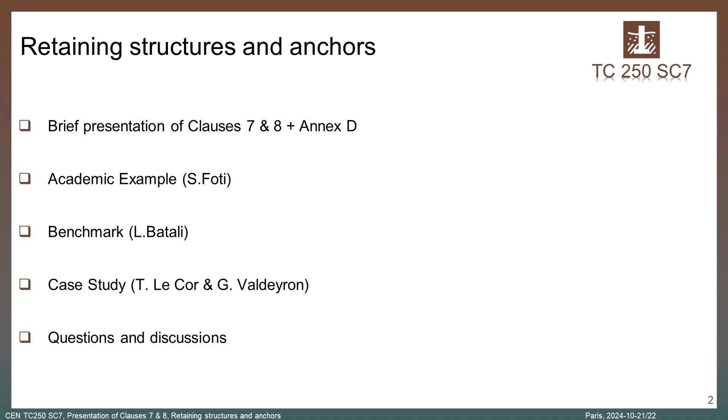made of 4 presentations: a brief presentation about clauses 7 and 8 that are really related to retaining structures and anchors, plus a short presentation of Annex D, where you can find different calculation models in line with the design of retaining structures and gravity walls.

After, there will be an academic example presented by Sebastiano. Then, the results of the benchmark will be presented by Loretta, and to finish, we will have a presentation from Gilles about a case study. It has been prepared by Thomas and Gilles, but Thomas is not here because his wife just had a baby, so he has better things to do, if I can say that.

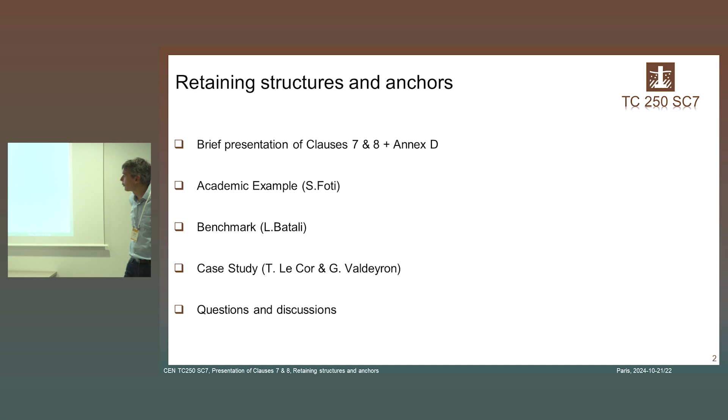We have more or less an hour and a half to cover all these subjects with questions and discussion. So the idea is to maybe have questions just after each presentation, and since the presentations are not so long, it will be possible to have a general session of discussion at the end.

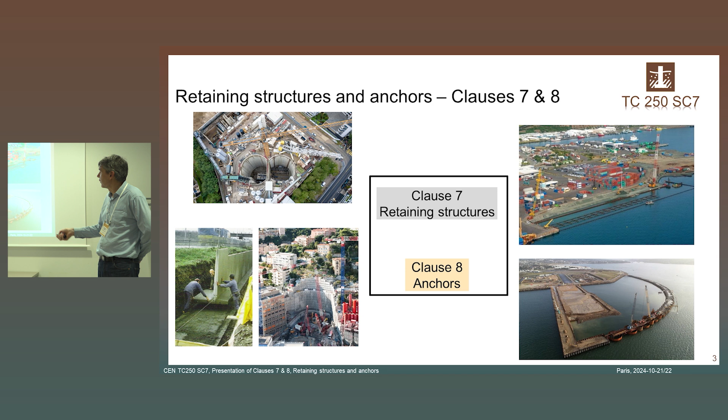The content of clause 7 and clause 8 is about retaining structures and anchors, so it covers a very large range of structures. You can have, for example, a metro station; it can be used for maritime infrastructure, or it can be used for gravity walls, so for maybe a simpler geotechnical structure, or a big retaining wall, as you can see there in Monaco, for example.

So the design of these structures refers to different parts of Eurocode. First of all, of course, Eurocode 7 part 1 and part 2 regarding the GIR and the GDR, as has been described this morning.

There is the question of groundwater level, which will be addressed, I think, by you, Adrian, not in this room, but in the amphitheater, just after the coffee break. It refers also to numerical models; finite element methods are more and more used to design all these structures, especially huge retaining walls or huge deep excavations.

The interaction with the other Eurocodes is also ensured regarding Eurocode 0 for the design principles, the actions - especially, for example, for maritime infrastructure, as Jean-Bernard said this morning, when you have waves and river, you can have actions from both waves and rivers - and after you have the structural verification, depending on the type of material: concrete for diaphragm walls, steel for sheet pile walls. You can also have timber and masonry if you have that type of geotechnical structure.

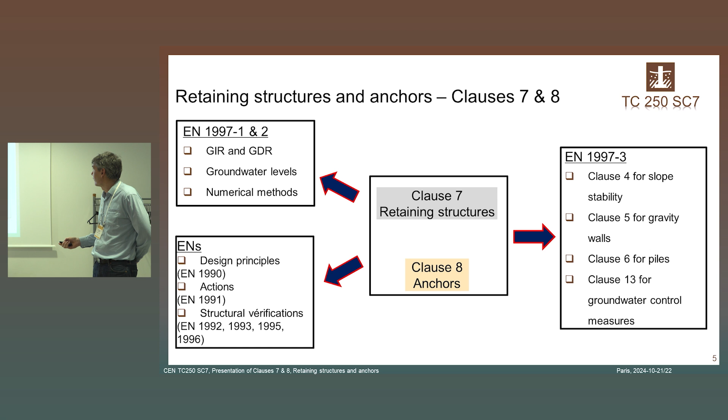After, inside Eurocode 7 part 3, these two clauses are in interaction with many other clauses. Maybe it's not the case when you read shallow foundations or deep foundations - the interaction with other clauses is not so important there - but here you have to refer, of course, to clause 4 in order to check the overall stability.

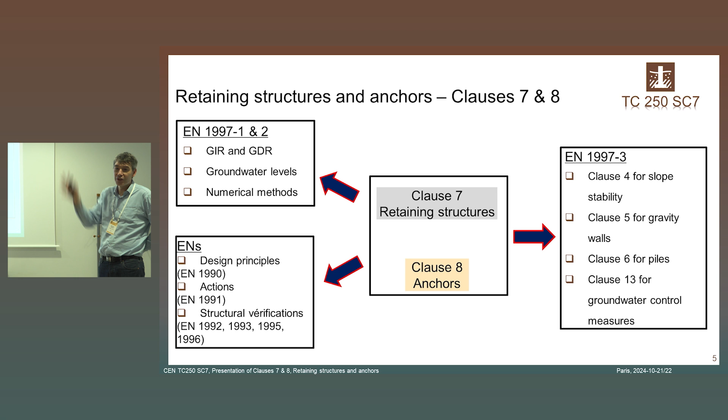When you design a gravity wall, you have to refer to clause 5 in order to verify the external stability of your wall, considering the sliding verification, the bearing capacity verification, and in some conditions where you have a wall on piles, or a diaphragm wall submitted to huge vertical loads, you have to refer to clause 6 in order to verify the bearing capacity of the diaphragm wall, for example.

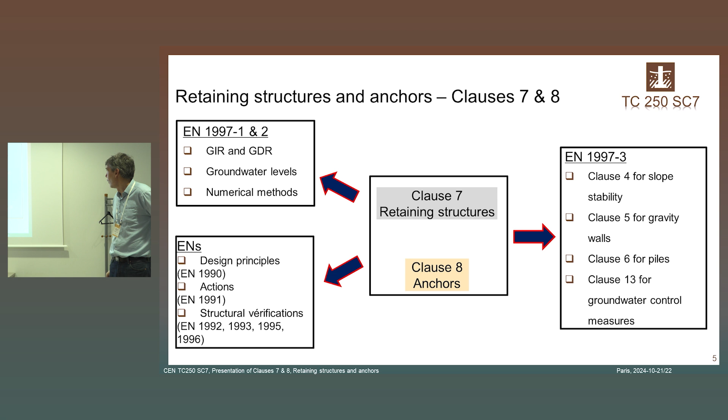And at the end, since you have to manage water for these structures, you can refer to clause 13 about groundwater control measures. So we can see that clause 7 and clause 8, in fact, are really in interaction with many other clauses of Eurocode 7 part 3.

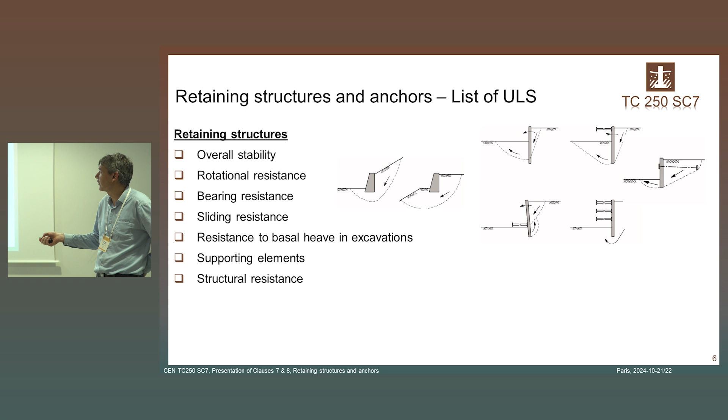So in detail, it's very difficult to give you an exhaustive overview of the content of clauses 7 and 8. Regarding retaining structures, I think what is most important in the code - well, everything is important - but maybe the most important is the list of ULS that can be useful for the designer in order not to forget which limit states to verify: overall stability, rotational resistance, bearing resistance, sliding resistance, resistance to basal heave in excavation, the supporting elements, especially anchors, and after the structural resistance of your sheet pile wall or diaphragm wall. So this is what you can find for retaining structures.

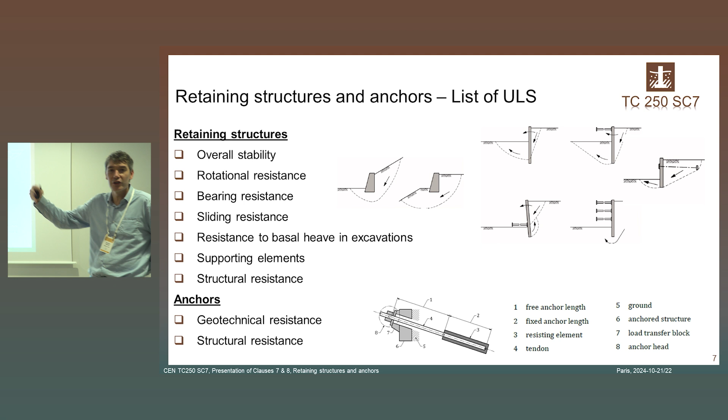And regarding anchors, there are two main verifications: one for geotechnical resistance and one for structural resistance. Of course, if you have struts, it's not directly covered by the code because it only refers to the structural resistance of the strut, so you can directly go to Eurocode 3 part 5. So regarding retaining structures, there are many aspects to consider for your design.

Maybe the most important thing we have kept from the old Eurocode 7 is the uncertainties about the wall height h that we have to consider. Depending if we know or have uncertainties regarding the depth of the excavation, we can vary this height with this parameter.

After that, of course, there is the groundwater level, groundwater flow, and dewatering system, which will be completely addressed by Adrian in the next session. There are also, in some conditions, environmental effects described, such as temperature for the strut, the effect of frost for gravity walls, or the effect of swelling, both for gravity walls and at the base of the deep excavation.

After this, as for any clause in Eurocode 7 part 3, you have a table with the depth of the ground investigation. This table is a nationally determined parameter, so it can be changed in each country depending on your own practice. It's always a difficult subject to address, what should be the content of the ground investigation, but you can find this table as a first attempt to define something.

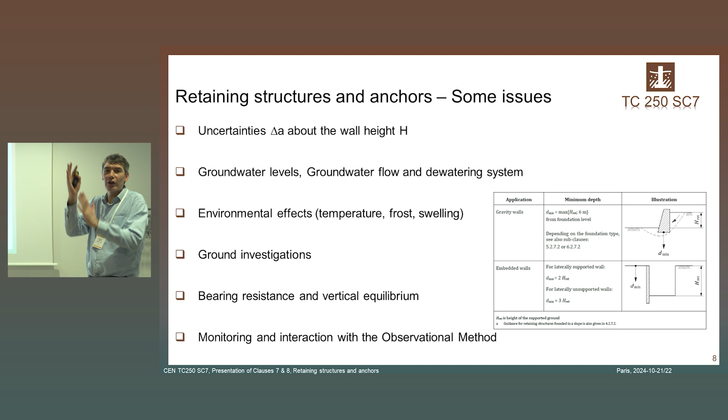After that, some points are important but I will not address them in this presentation: the bearing resistance and the vertical equilibrium. It refers to clause 6, but you have some indications in clause 7 about the fact that you have to consider the vertical equilibrium into your design. And after that, you have information about monitoring and interaction with the observational method.

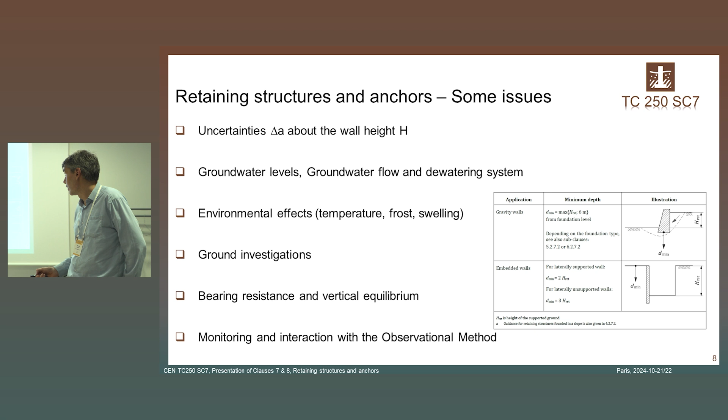Maybe what is most important in this clause is this table where you can find the different approaches that have been selected for the design of retaining structures. Here, in fact, we can proceed as we want. For example, if you focus on piles, there is a clear approach with VC1 and the resistance factor approach. For shallow foundations, the number of approaches in Europe are similar, so it has been possible to harmonize the practice.

But for retaining structures, we have, in fact, two completely different points of view. There is, if we start with the resistance factor approach, combined with verification case 4. This refers, in the old Eurocode 7, to the DA2 star.

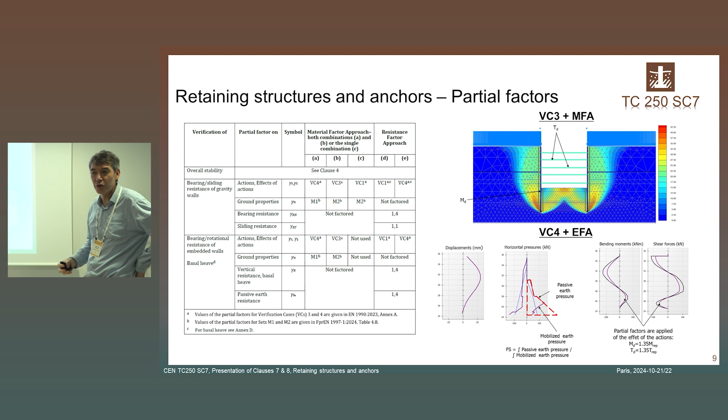You can make a calculation with representative values, and at the end of the calculation it's possible, for example, to calculate a kind of safety factor by making the ratio of the passive pressure to the mobilized pressure, or the effect of actions obtained by applying the partial factors on the representative value. So there is this way of calculating.

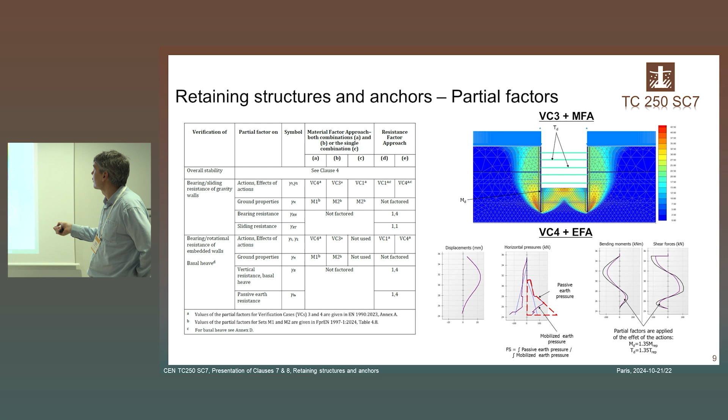Or we can proceed to the old DA3, or the geotechnical combination of DA1, where you combine a material factor approach and verification case 3. With verification case 3, there are no partial factors applied on the actions - not on the active or passive earth pressure - and you apply the partial factors directly on the shear strength properties.

So basically, this combination of VC3 plus MFA, when you calculate a huge excavation, you proceed to a shear strength reduction procedure, which is now a very common approach in many software.

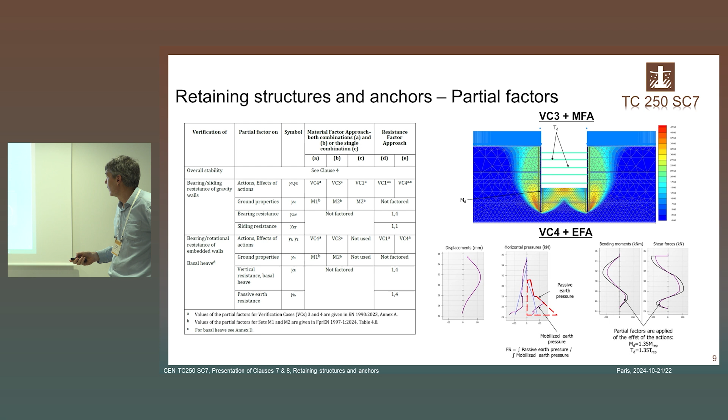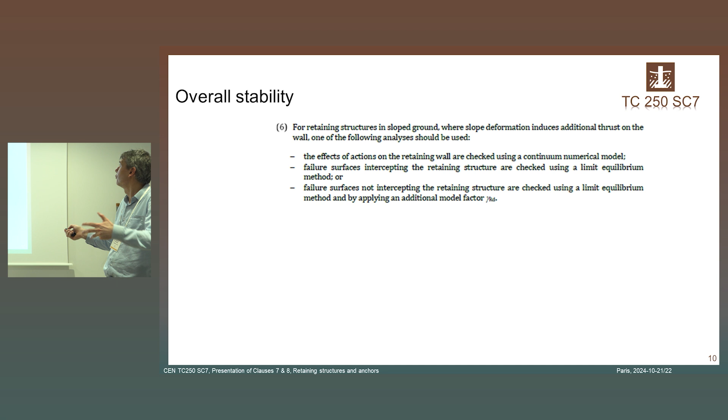After that, maybe a clause that has provided much discussion is when you have to analyze the interaction between the retaining structures, and you have to analyze the overall stability, or how the deformation due to the verification of overall stability can influence the bending moment or the shear forces into the action.

This clause is, I think, important for the design, and so you can have several ways to follow. You can proceed directly to, for example, shear strength reduction. It's what is written here: the effects of action on the retaining wall are checked using a continuum numerical model.

You can check the overall stability by considering a failure mechanism that goes through the retaining wall, or you can also check overall stability by considering only failure mechanisms that go below the retaining wall. In this case, in order to ensure enough safety, the code recommends applying an additional model factor to have enough safety when you calculate this failure mechanism.

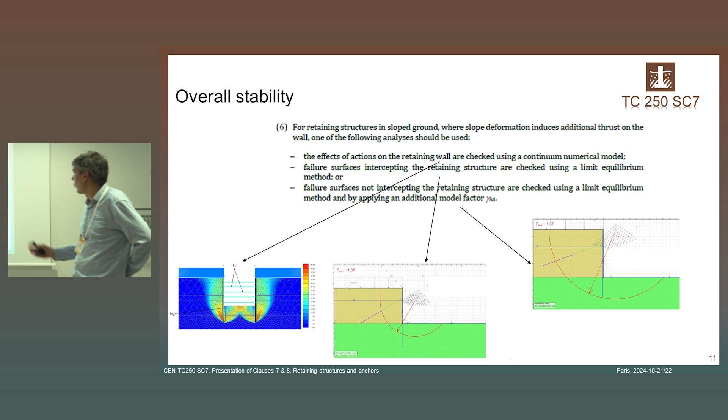So I think regarding the design of retaining walls, this is what you can say. After this, in the annex, I will come back to different issues.

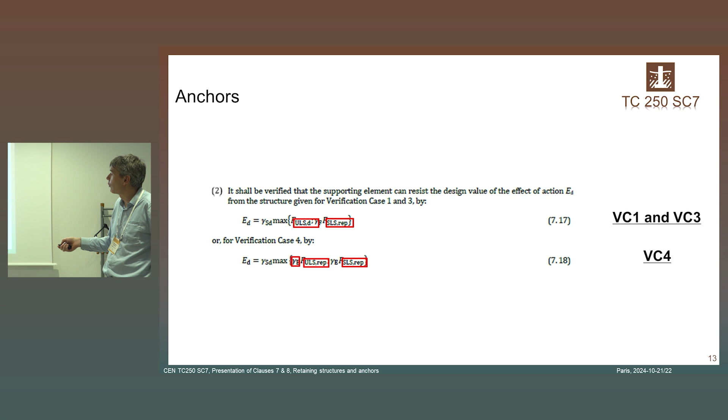Regarding the anchors, maybe the most important aspect is, again, the distinction between VC1, VC3, and VC4. With VC1 and VC3, it's possible - especially with VC3 - to have directly the design value of the action, for example into the anchors, so we apply just a partial factor outside. While using VC4, the old DA2 star, we calculate the representative value in the anchor, and so we need to apply a first partial factor on this representative value, and a second, if necessary, depending on national practice.

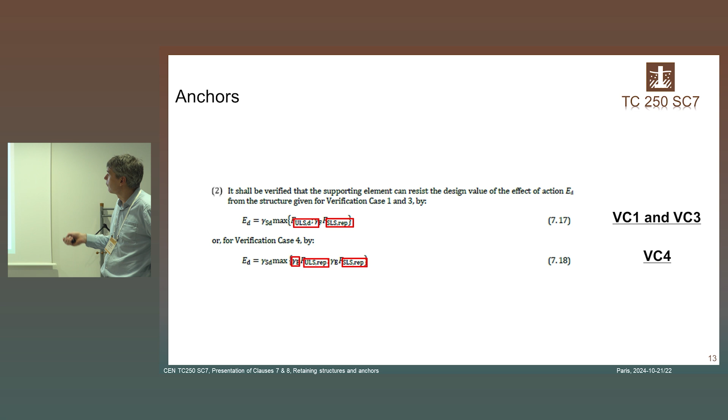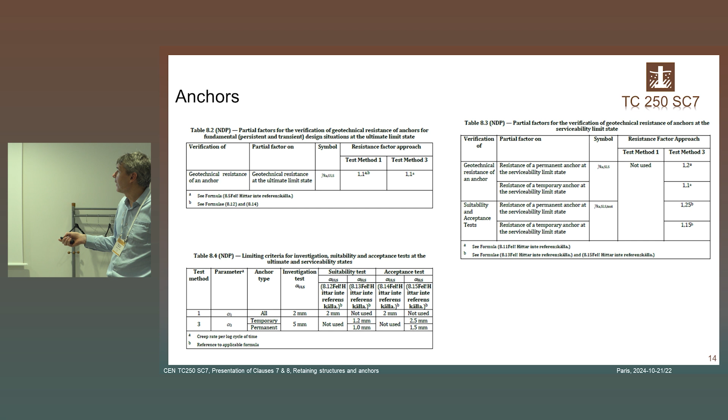So this is, I think, a very important clause when you make the calculation of anchors. Regarding the anchors, what we can highlight is the existence of different tables that are in line with the test method that we use in order to check or control the tensile capacity of each anchor.

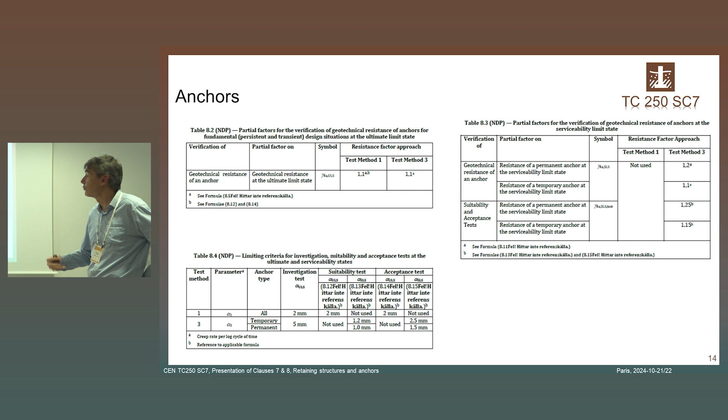So you have two test methods, and depending on the method, you have different partial factors that can be used. Each test method is linked to a creep parameter that can differ from method 1 to method 3. Again, the idea of this table is open to national choices, but it presents to the designer the different ways of designing anchors across Europe.

After, it's maybe important to finish the presentation by quickly describing the content of Annex D. So what we can find there are the relationships to calculate the active and passive earth pressure. The question of stress inclination is addressed in the main text, with recommendations to limit or not limit it. In general, the stress inclination is limited to 2/3 of the friction angle phi, but you can have greater inclination.

In Annex D, you will find the description of different models that can be used according to Eurocode 7. For the design of retaining walls, Eurocode 7 does not recommend a precise calculation model. You can proceed to a limit equilibrium, which is generally the case for gravity walls.

And for deep excavation, when you have diaphragm walls or sheet pile walls, you can use beam on springs or finite element method. So the idea is to let the designer select the calculation model he considers most appropriate for the situation he has to design.

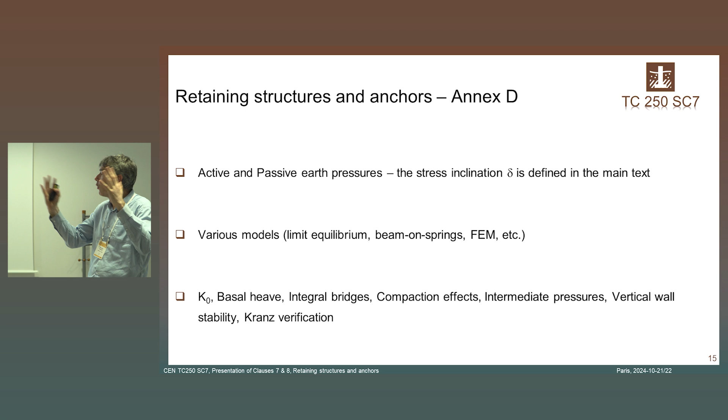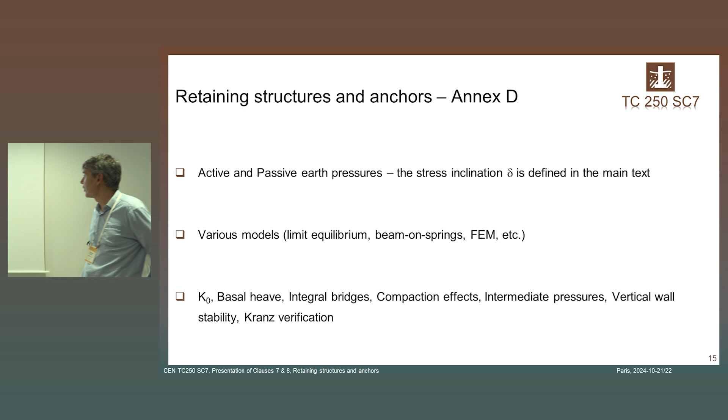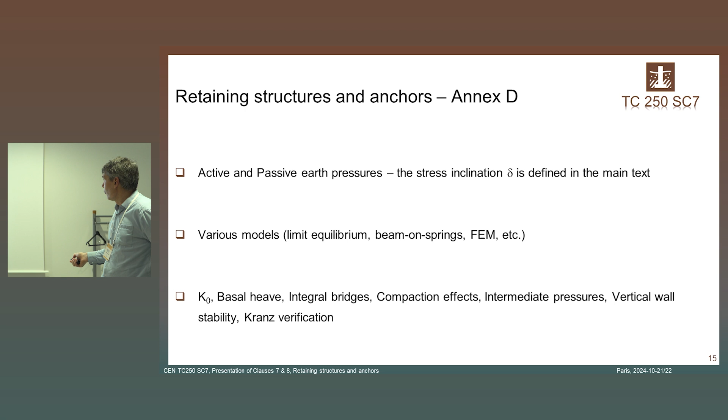Integral bridges are bridges completely connected to the pile, so thermal variations induce a lot of additional axial forces into the span, and it depends a lot on the passive earth pressure between the two extremities, the two edges. After, you have information about compaction effects, intermediate pressure, vertical wall stability, and Kranz verification.

We have spent a lot of time precisely calculating the different coefficients, because these coefficients were determined, I think, 80 years ago, so sometimes it's difficult to identify the clear relationship. But it's important to say that the annex describes three coefficients: for weighted ground condition, for weightless condition, and the effect of cohesion.

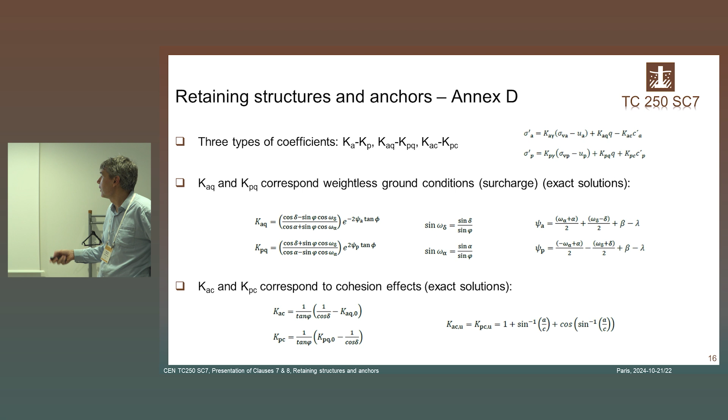For weightless ground condition, we have presented the exact solution, so if you use it, the calculation is exact. For the cohesion effect, you can also use the exact solution. And for weighted ground condition, you can use an approximation to calculate the earth pressure coefficient for active or passive states, or you can directly use the Caquot-Kérisel chart.

Another subject discussed with our colleagues from Eurocode 8, especially Sebastiano and Luigi Callisto, is ensuring full compatibility of this coefficient with Eurocode 8 part 5. You can proceed to a rotation of the model, or in Eurocode 8 part 5 you have direct relationships to calculate active and passive earth pressure in seismic conditions, fully compatible with this rotation of the model.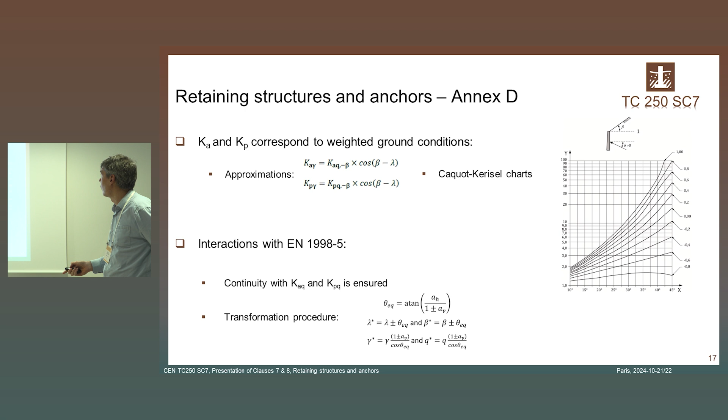So in conclusion about these two clauses, it's very difficult in 10 or 15 minutes to describe all the interactions, but many types of retaining structures can be addressed, from very simple gravity walls to a metro station with different levels of slabs, anchors, or struts. The interaction with anchors, as was the case for the old Eurocode 7, is completely addressed, with one section for retaining walls and another for anchors.

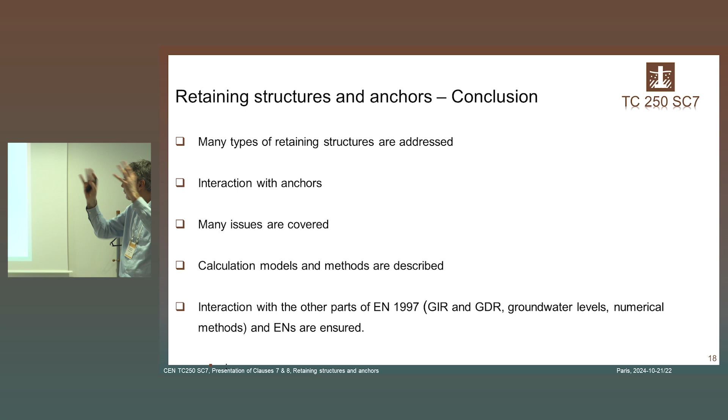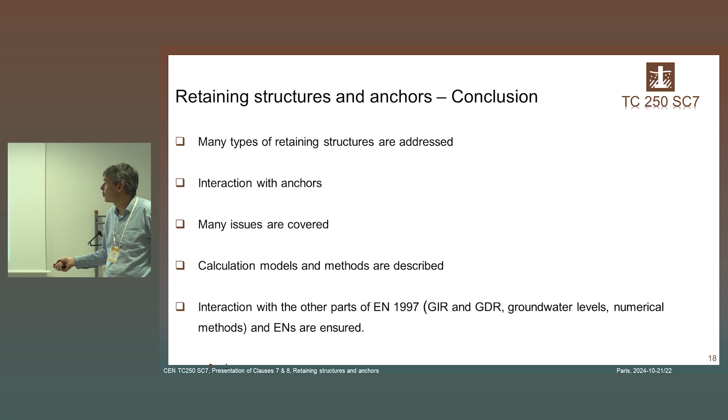As I have tried to present, many issues are really covered in addition to the old Eurocode 7: the way to calculate the earth pressure coefficient at rest, the verification of basal heave, the Kranz verification. We have a very complete code to address the issues necessary to design a retaining wall. The calculation models and methods are also described, which is nice especially for young engineers. And all the interactions with other parts of Eurocode 7 are ensured. Thank you for your attention.